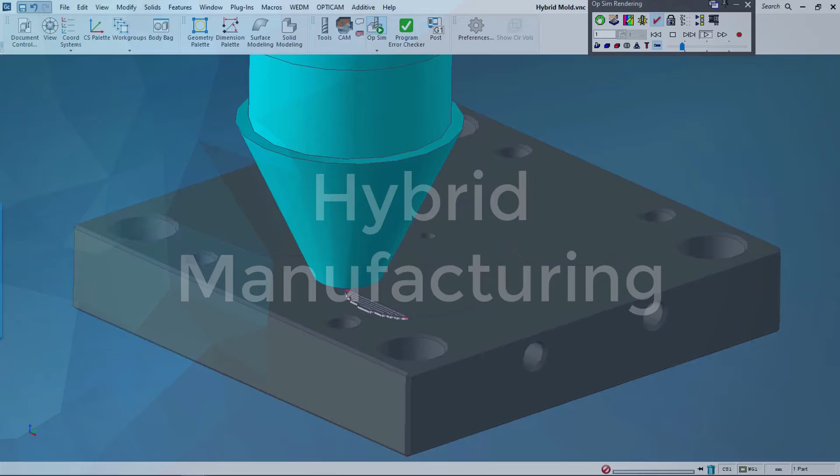Supporting cutting-edge technology is the cornerstone that GibbsCAM was really built on. You know, from the beginning, Bill Gibbs set out to make manufacturing automation easier to use. That was the whole idea of GibbsCAM. And in GibbsCAM 14, this continues with hybrid machines.

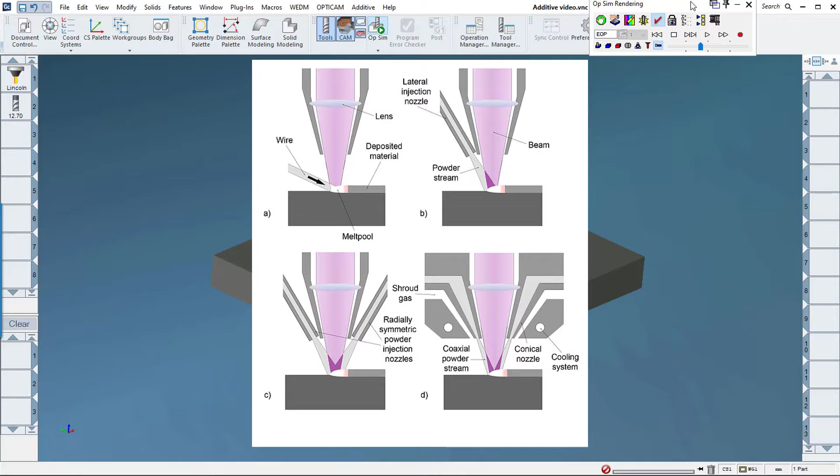A hybrid CNC machine is a machine that combines both additive and subtractive manufacturing. Let's take a look and see how they work. Hybrid machines use a process called cladding. Cladding lays down a bead of material by using a combination of shielding gas, a laser, and some type of material. That material may be in the form of a powder or a wire.

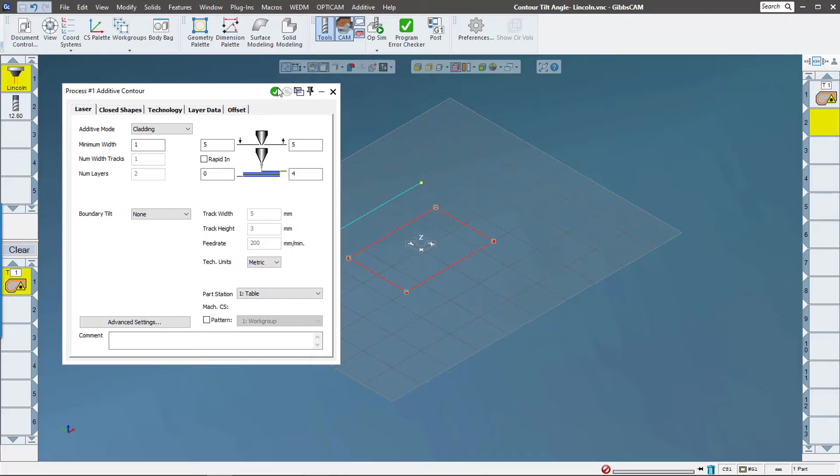All of these technologies are supported in GibbsCAM 14. Not only are they supported, but programming a hybrid CNC machine is as easy in GibbsCAM as you would expect. I'm just going to pull down that cladding head here, and I'm going to pick what I want to do. I'm going to contour this shape. And I'm just going to go ahead and click do it. And let's go ahead and see that in simulation.

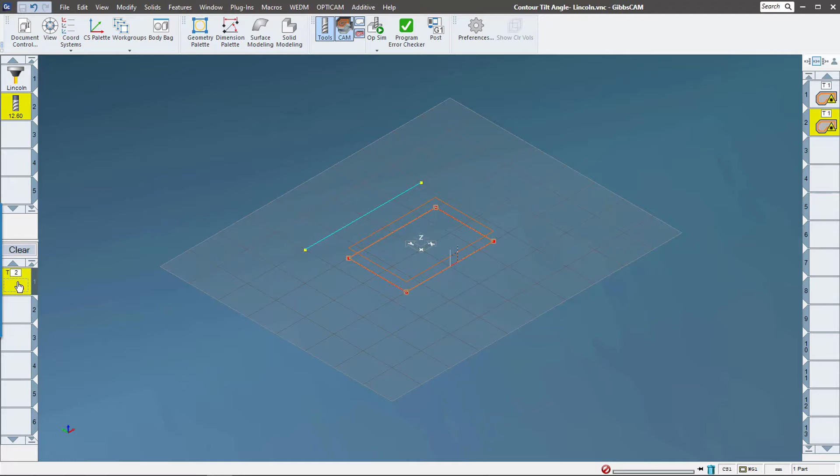So here we can see the laser and the gas shield around it and the material being laid down. That's the additive part. Let's talk about the subtractive part, right? Because it's hybrid. I'm going to pull down this cutter and I want to clean up the outside of that, make those corners square. So I'm just going to go ahead and just make a really quick contour on this.

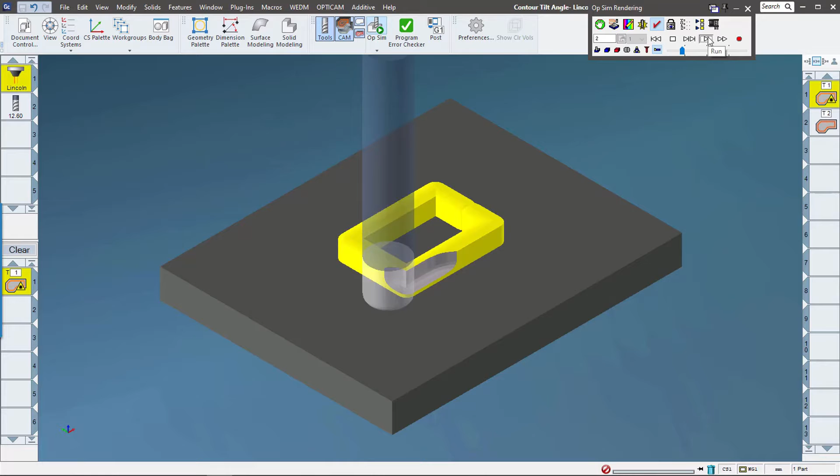Now let's go ahead and see what we've got. So there's my bead being laid down. And now here's my cutter coming in and just cleaning up the outside of that. So this is a pretty basic example, laying down some material and taking some away. Let's look at a more complex application.

In this example, this injection mold is a little bit worse for wear. These knobs are made out of some really abrasive plastic, so the core is really worn down. So what I want to do is I want to replace just this core, these core pieces, using hybrid technology. So I'll show you how easy that is in GibbsCAM.

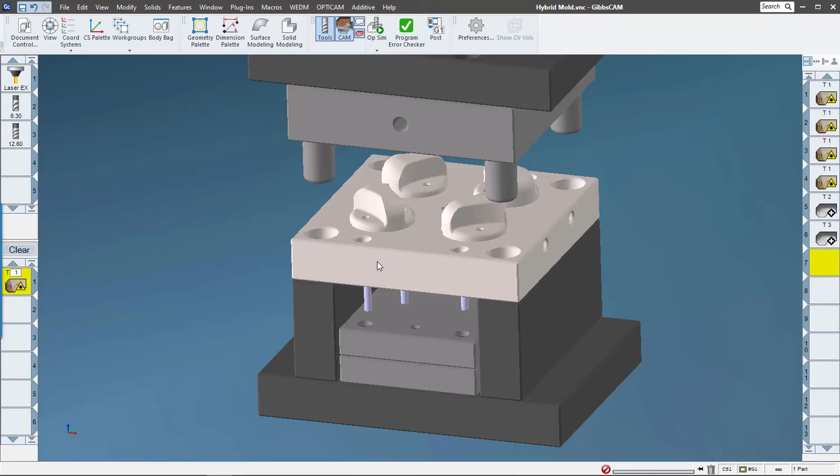First thing I want to do is I want to go ahead and throw all this stuff in my body bag. And now just lay down material. Now I've done a little bit of pre-baking here, but we can see that with the technology, I have some options here. Zigzag, I can do a rectangular fill, a circular fill, custom.

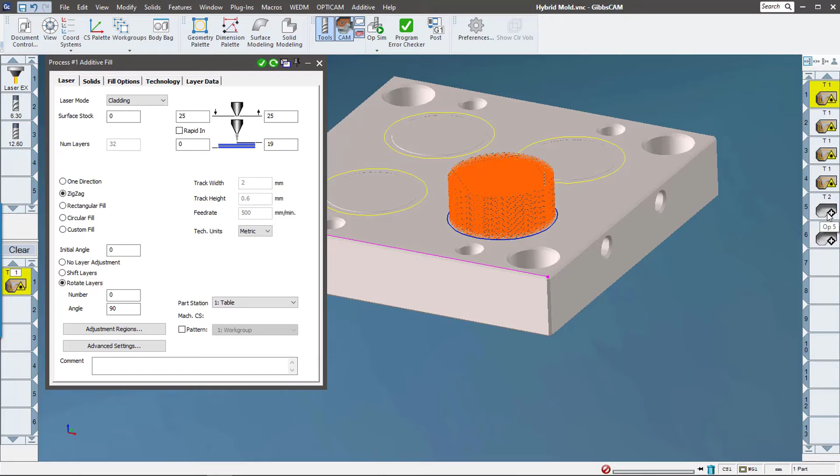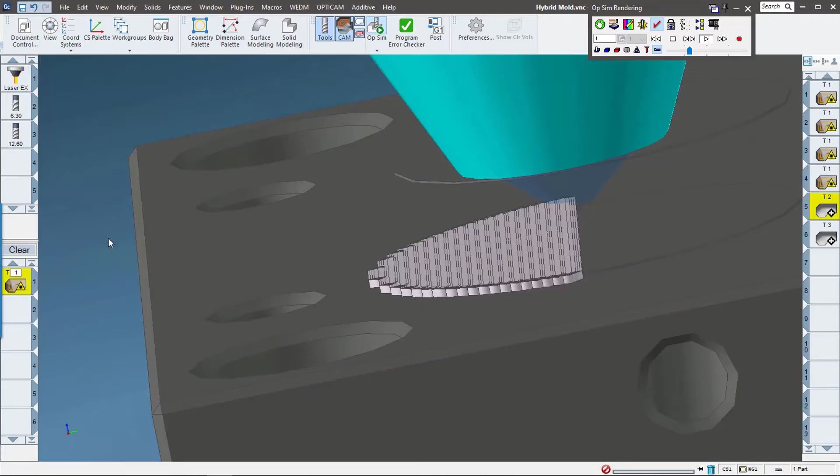These additive operations are going to be what's going to lay the material down, and then they're going to be followed up by these 3-axis operations that are going to go ahead and machine out that knob. So let's go ahead and see this in simulation. If we zoom in here, we can see that it's laying down these beads of material, but it's overlapping them. So it's kind of melding them together.

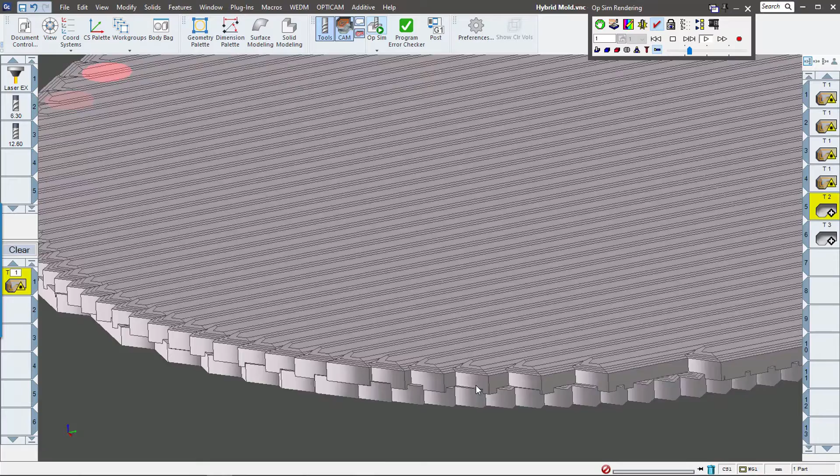If we look at this red circle, that's what's called the melt pool. And it makes this kind of melted part between both layers and passes. If we zoom in close, we can see that they're both overlapping in the Z and in the XY. This makes for a really, really strong material when it's laid down. So I'm going to go ahead and fast forward through this so we can see the machining part.

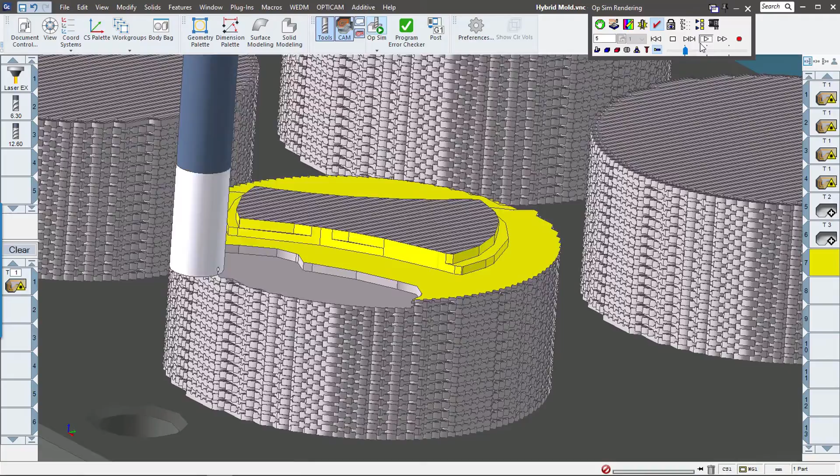Okay, let's slow it down. So here it's coming in and actually machining away, let me speed up a little bit, the material that I laid down. Now it's really interesting, if you look at the pattern of the material that was laid down, it almost looks like it's laced together. And that's because of that melt pool that it uses to bind those layers together.

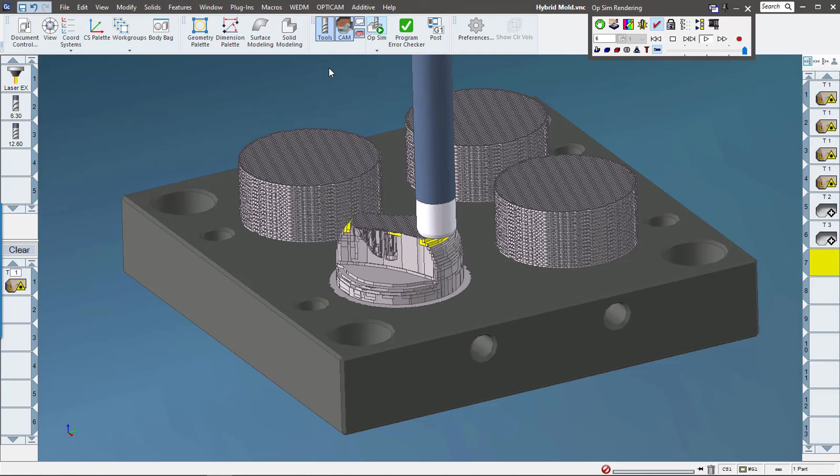So there it's going to go ahead and rough it all out. And then there's the finished pass.